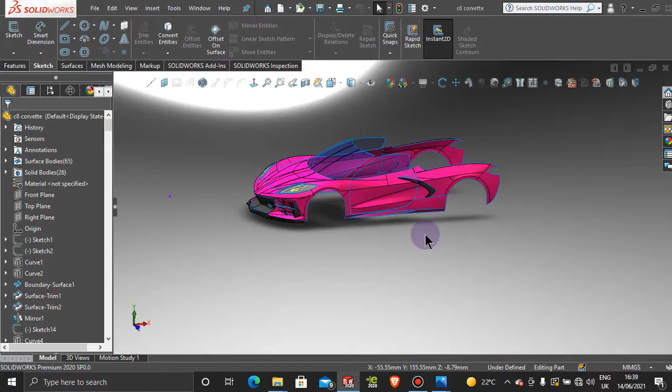Let's open our model and go over a few things. In the last tutorial we finished this section here. In this tutorial we're going to work on the C pillar, B pillar, and the roof of the vehicle, and close up this section here.

If we look at this picture, we have some steps in the roof. So first we're going to create a simple surface, and once we have the surface, we're going to cut these steps into it. It's always easier that way than creating complex curvatures, which of course creates problems.

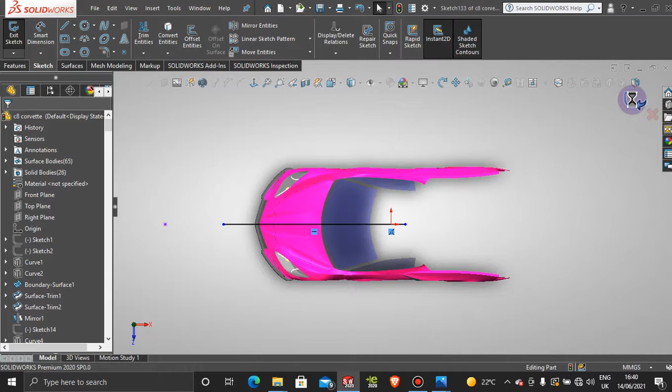Let's start by taking off some of these lines. I want to jump into the top view and make a sketch on the top plane—just a straight line like that—and project that line onto the windshield. So, projection, then sketch on face. I'm going to select this sketch, and for the face I'm going to select this section here. That's okay.

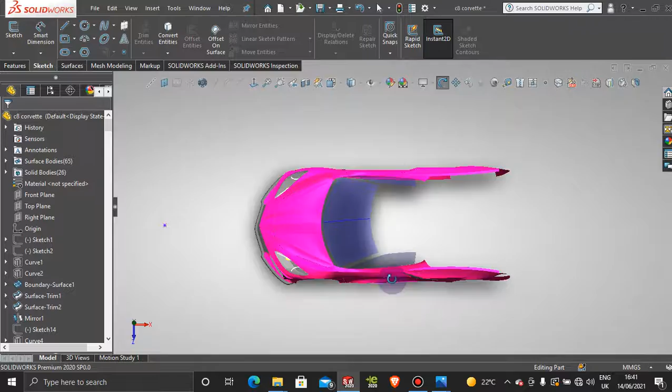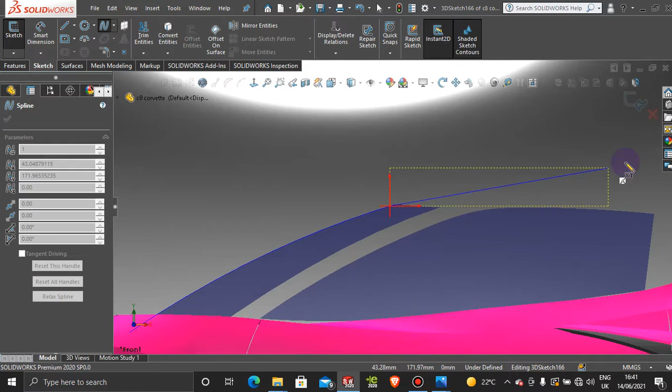Now you have the middle of the car. Let's jump to the side view, and I want to grab a 3D sketch with the 3D spline. I want to snap onto that line here, then just pull this out for now. I want to make that line go all the way, pulling the connector to the end of that point, and make that line tangent with that curve.

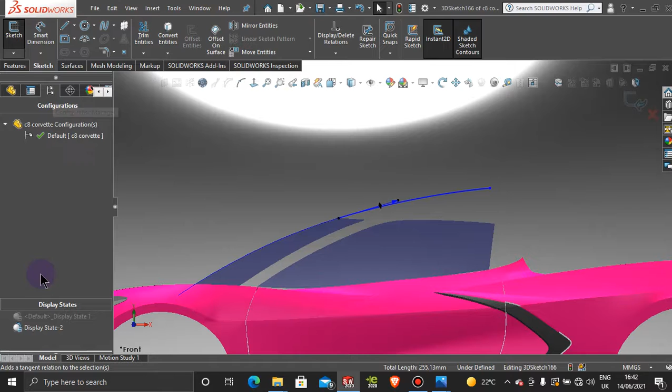Make that tangent. Once that line is tangent, I'll jump over to the first display state and align that line with the top of the vehicle. I'll pull it somewhere about here, and leave that somewhere here, just pulling on this handlebar until we have our curvature.

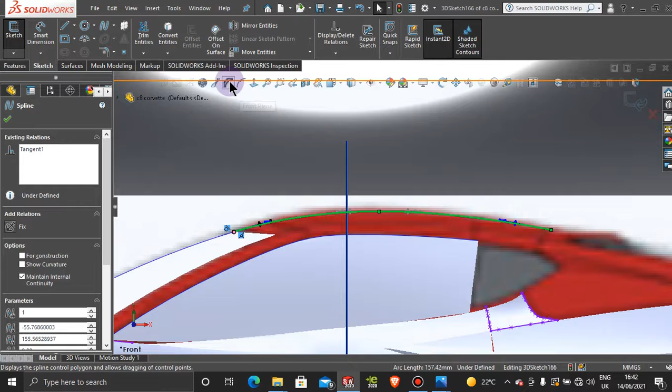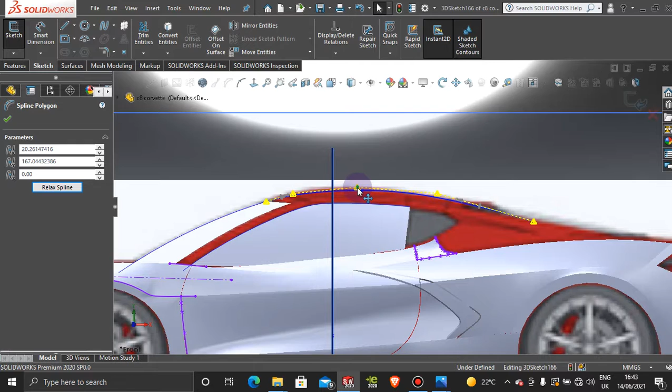Maybe I'll add a spline point somewhere in the midline here. Let's click on that line and add the control polygons, then make some adjustments to the curvature further. I'm happy with that curvature—I'll pull that down a little more somewhere here, and give that a bit of flatness up top. I'll leave that line as it is. That looks good.

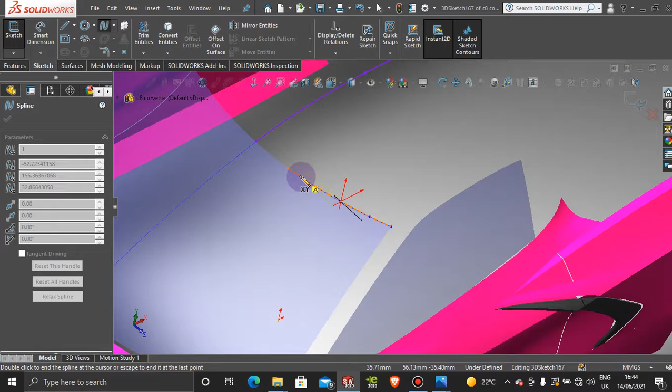So to continue, what I want to do next is probably go to surfaces and do a sweep surface, selecting these edges here. Hold on a second—let's go to sketch, 3D sketch, and grab the spline. I'm going to grab from this corner and follow this window up to this point, then do a sweep surface.

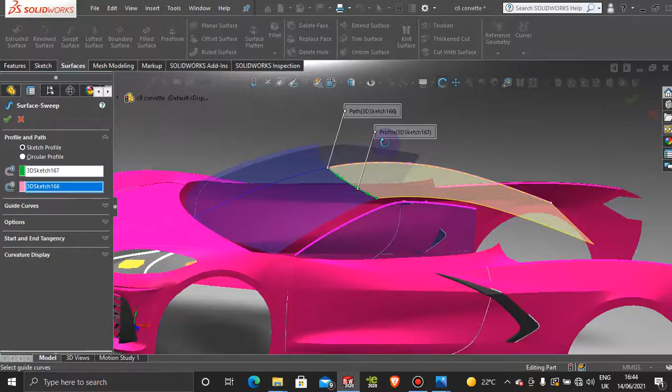So surface, sweep surface. Let's select this 3D sketch and then select this line here. All right, that probably won't do what we're looking for here, so exit that. Okay, instead let's try something else.

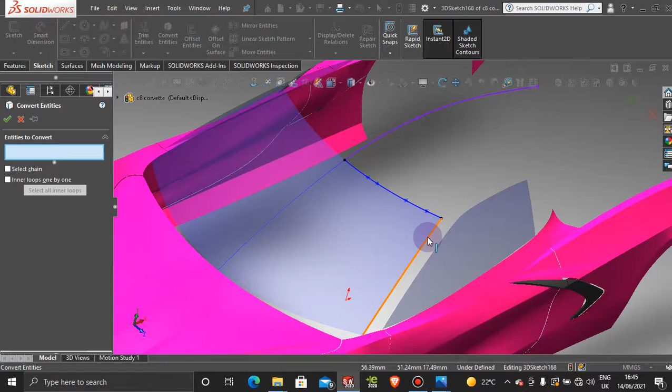Let's do sketch, 3D sketch, convert entities, and convert this entity here. Actually, we might not even have to convert that, so delete that converted entity there.

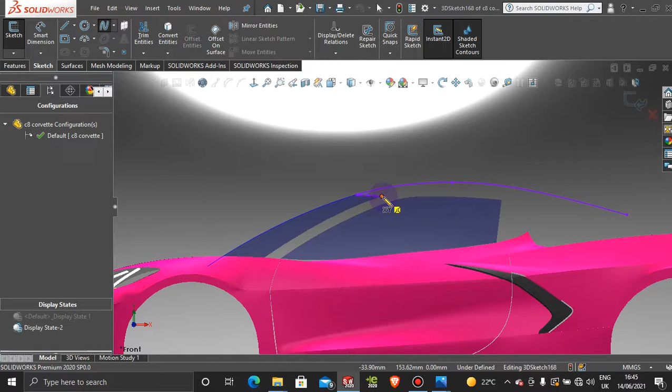Instead, let's jump to the side view and grab a 3D sketch. We want to come from the edge of that window—that's going to be that point there—and come down all the way here, trying to add tangency to that curvature as well. Tangency.

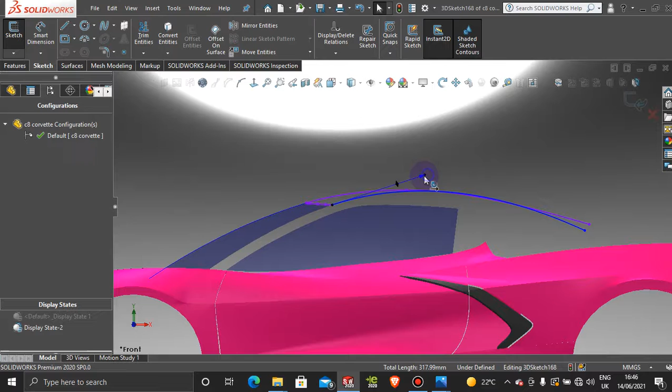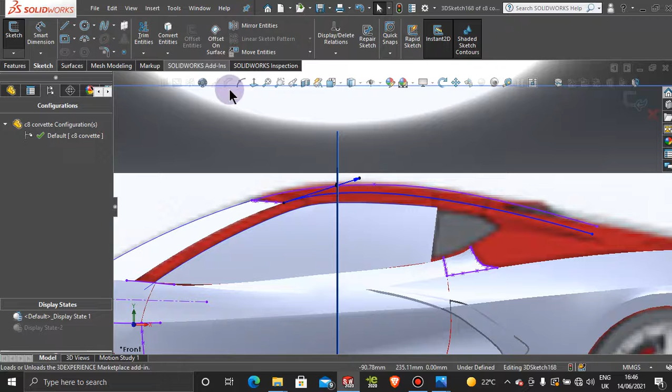Just pull that line until we're happy with our curvature. Let's jump into our first display state. That curves up to that point there, and maybe we can add a spline point somewhere around here. Then click back on that line, add the control polygons, grab onto those polygons, and pull it to this section here.

So I'm quite happy with this window curvature here. We're not going to use the whole line anyways, just a small section of it. Let's jump to the top view and try to align that window in this area, somewhere here, and pull that somewhere in this area.

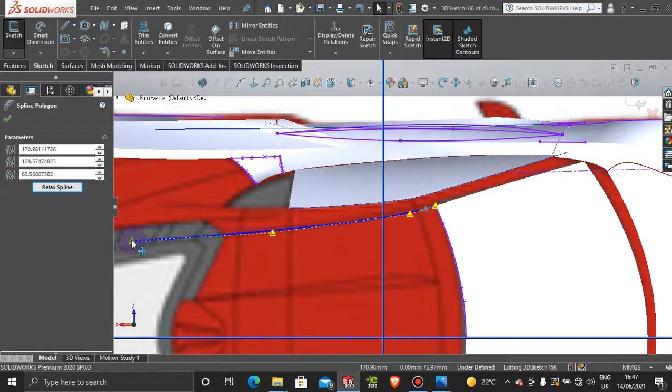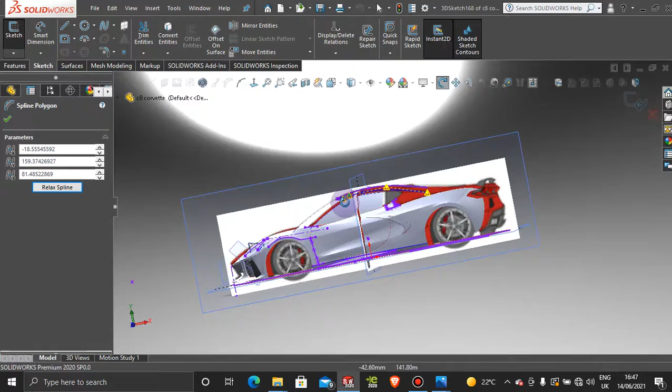Somewhere here. Yes, I'm quite happy with this curvature here. Let's double check from the side. Looks good. Okay, exit this sketch.

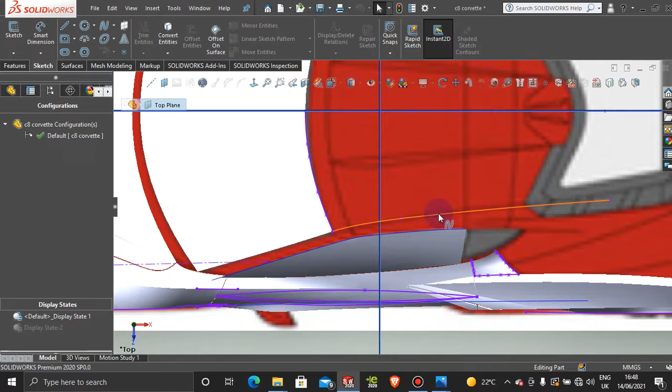All right, let's have a look from the top again here. And then we're looking quite good here on this area. That will go down in this section. Okay, so let's add a 3D curve here.

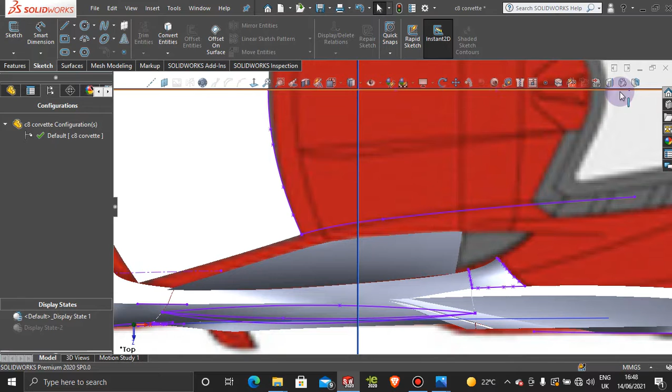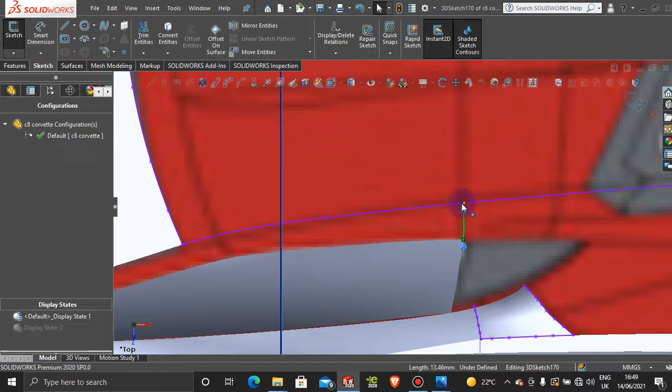I mean a 3D spline. Hold on a second, let's get rid of this 3D curve here, so hide that. Okay, let's jump into 3D spline, and then we're just gonna go from this corner up to this point, kind of straight-ish. So we don't need to fix that. Something like that.

Okay, and then we're just gonna give that curvature some profile, right?

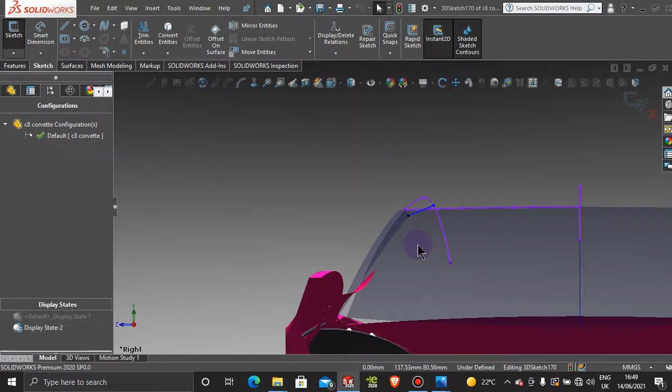All right, so let's click on this curve here, and I'm just gonna pull it out and this way, right? And then I want to fix this point along the z-axis, so we are straight onto the top of the vehicle, and possibly I want to pull this out a little bit so we have a little bit of profile on that.

Okay, so that looks good. And then we can always adjust that afterwards as well. So now exit this sketch here.

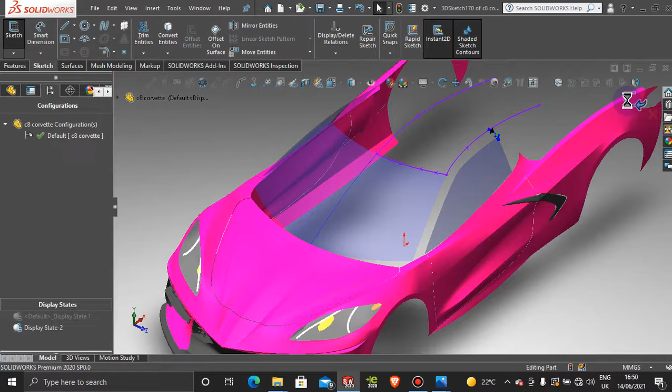And then we come down here and then we create this area. So let's grab another 3D spline. And we're gonna come from this corner up to this edge. And I'm just gonna pull that down until it stops. All right.

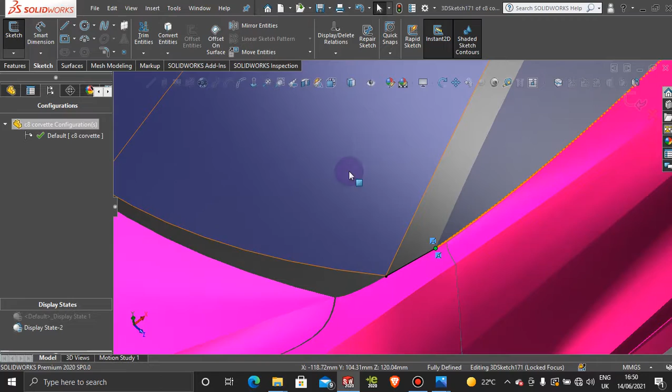And we're going to give that a profile as well. So we can do tangency with this face, and let's see how that looks. No, it's not going to do that. So we're going to edit ourselves.

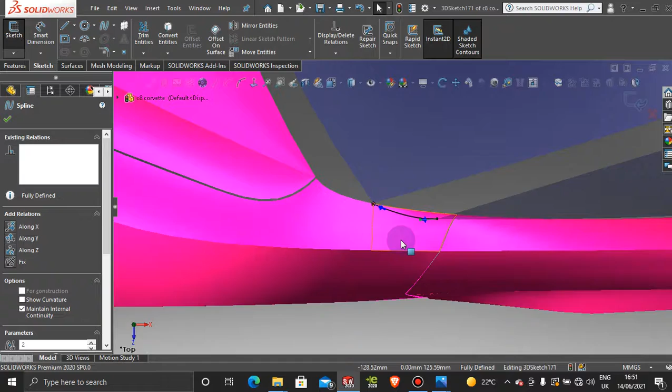Let's grab the point and just pull it out. Something like that, and give this a little bit as well. Something like that. All right, so now let's have a look. Let's have a look at this profile here.

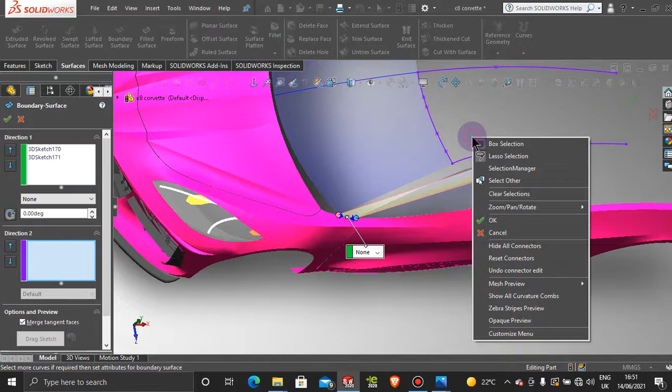Let's jump over to surfaces and let's do a boundary surface. So let's choose these two lines here. And obviously we need to flip these connectors. So flip the connectors. And for direction 1, selection manager, select these two here.

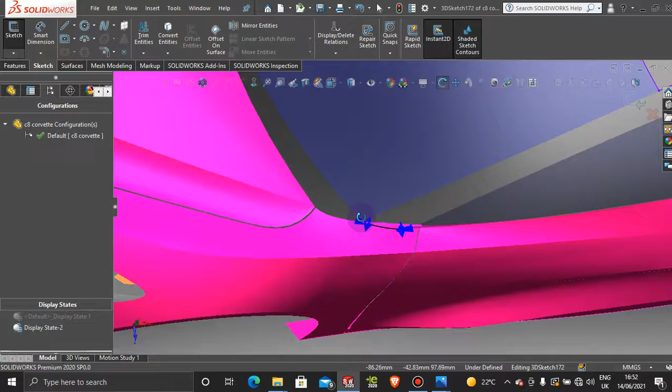Okay, so let's add a 3D sketch onto that, the 3D sketch spline. So we want to get on this point here. And I'm just gonna bring it all the way up here.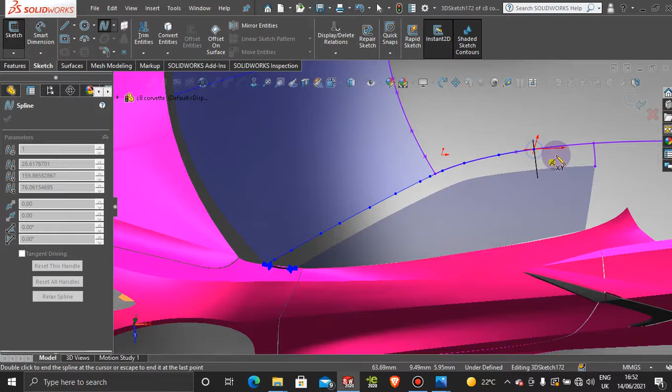Okay, and then now exit, and then now let's add our boundary now. So surface boundary, let's select these two lines here. And then direction 2, let's select our 3D curvature. Selection manager.

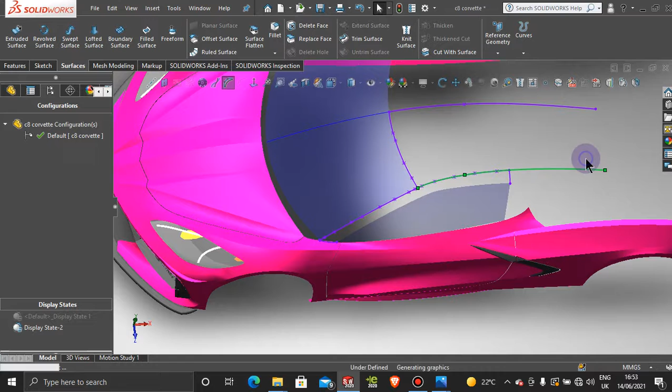Let's do it differently then. Let's select the window first and then select 3D sketch. Selection manager. All right, so let's hide this line for now. And let's see if we are connected here. Unfortunately, we are not connected on that one.

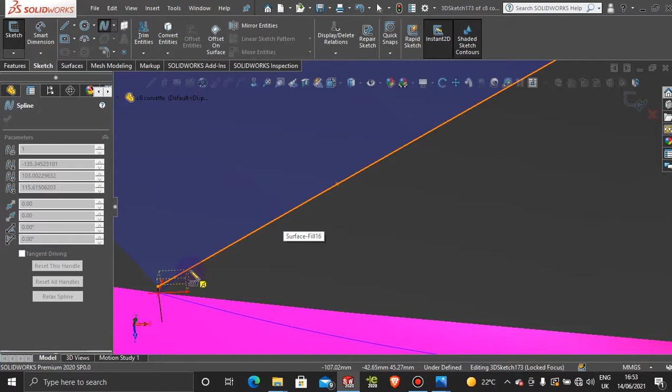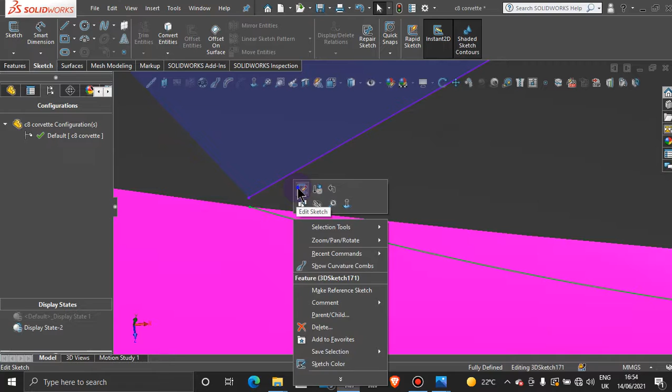So let's come in here and do another 3D sketch, another 3D spline. Or instead, let's take this line here. So exit the sketch. And let's take this line, edit the sketch. And let's connect to that, delete that coincidental. Let's connect to the edge. And you want to be right on the corner. All right, exit here.

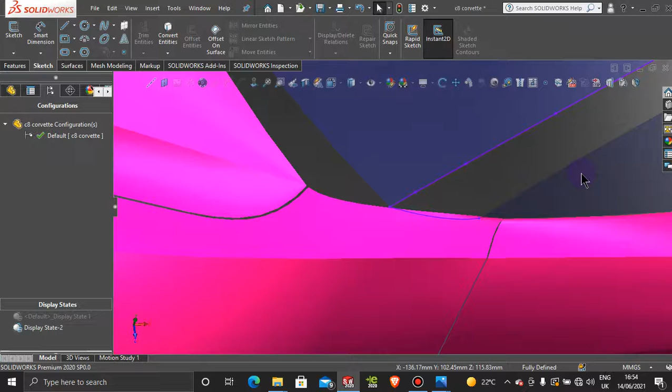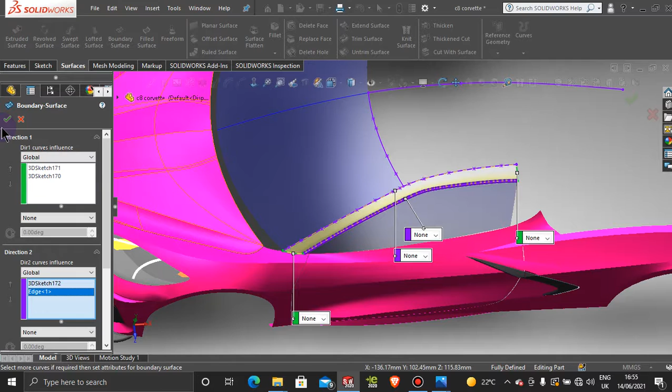And then now it should give us our surface. So let's jump into surface, boundary surface, select the two lines here and direction 2, this line here, that's perfect. And then the side of the window for second direction there. All right, so tangency, we don't have to add tangency anywhere around because we want to see this surface all the way around.

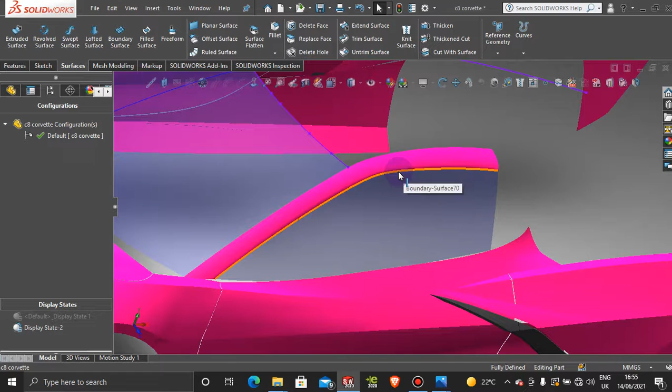Okay, so that looks good. And then we will fix this. It looks actually pretty good over there, boss. So we have a nice curve here. We can make actually this area here, instead of a curvy section here, we can make this sharper in the end or in the future.

We will see. All right, so once we have this one here, let's jump over to the feature tree. And I want to bring back that 3D sketch. So show that we hide before. Okay.

And I want to mirror this body over to the other side. So mirror, mirror over front plane, and then bodies to mirror. It's going to be this surface.

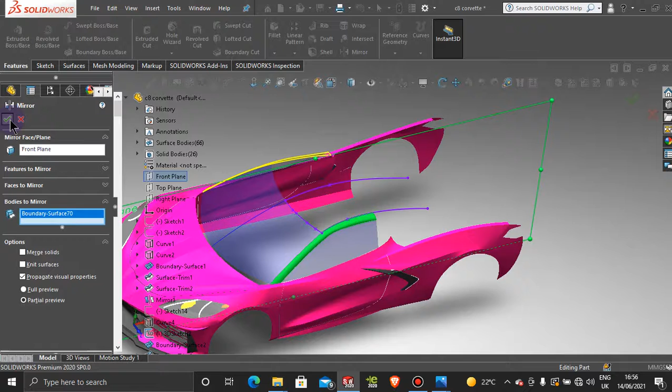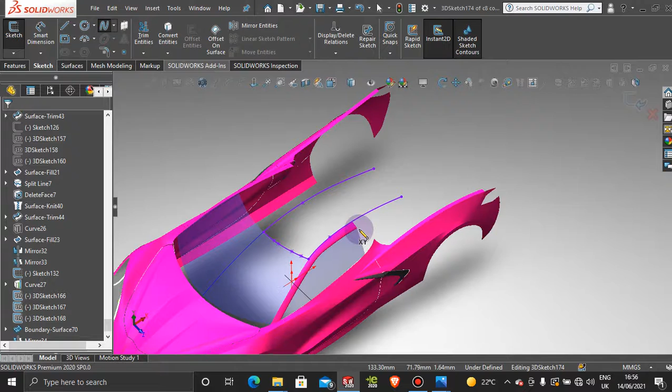Okay, and then now we just want to connect these two lines here. So let's grab obviously a 3D sketch, 3D spline, and then let's connect these lines here, just anywhere on this line. And then we're going to add tangency with this one and this one line here, tangency.

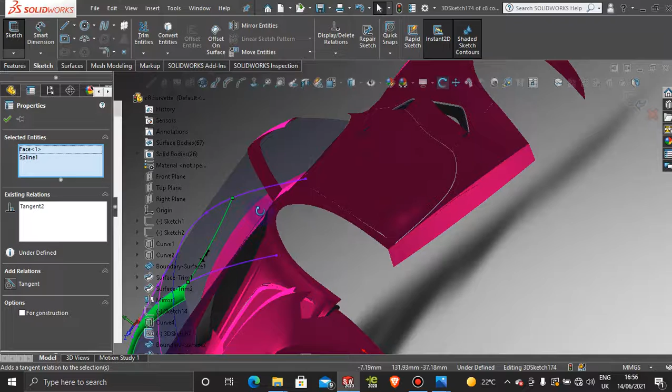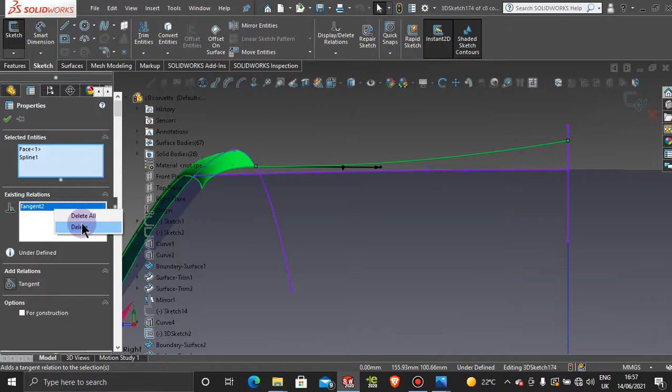Okay, so the tangency is not very good for us in this section, so let's delete that. Control Z to come out of the tangency. Let's exit the sketch first. Oh, that's not doing it, so let's delete that line.

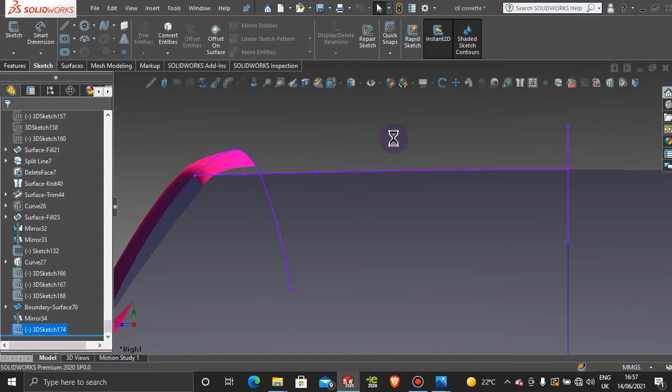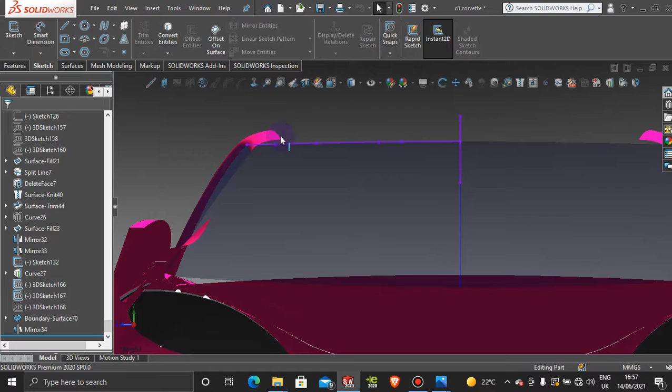Okay, let's hide this line. And let's come to the back here, and try to edit this sketch here.

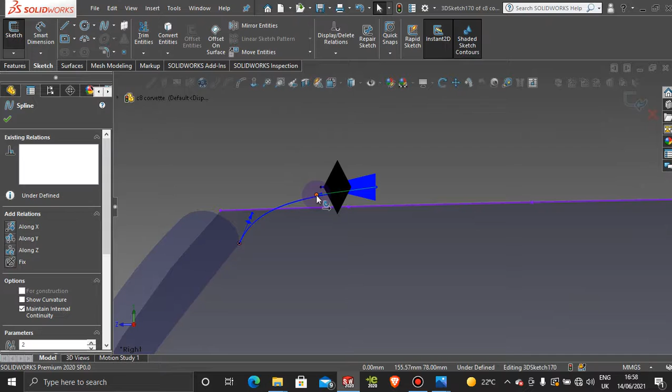So our point control here has a fix along Z, so let's take that down a little bit. Exit the sketch.

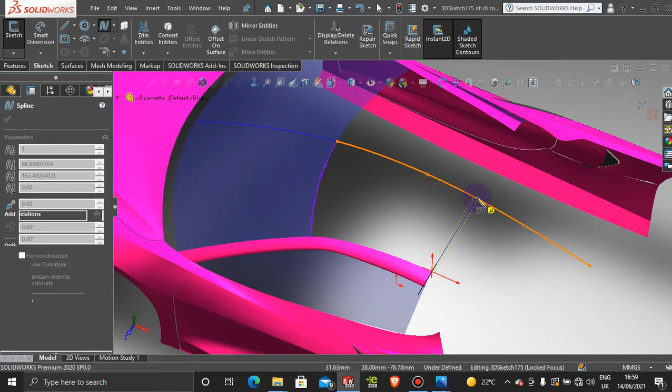All right, and then let's add the 3D sketch again. Let's jump to the top, and then bring back our first display state, so we can see how straight our line should be. So somewhere about here. Exit that.

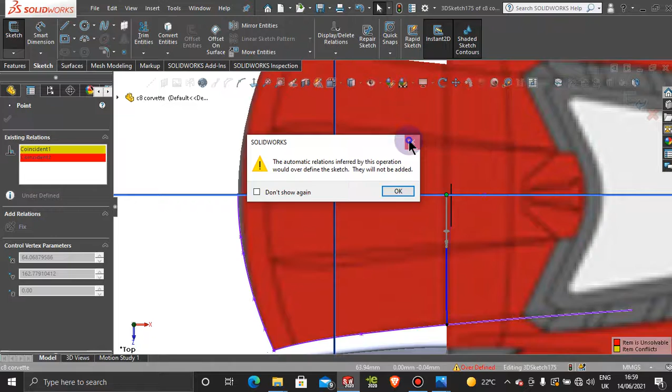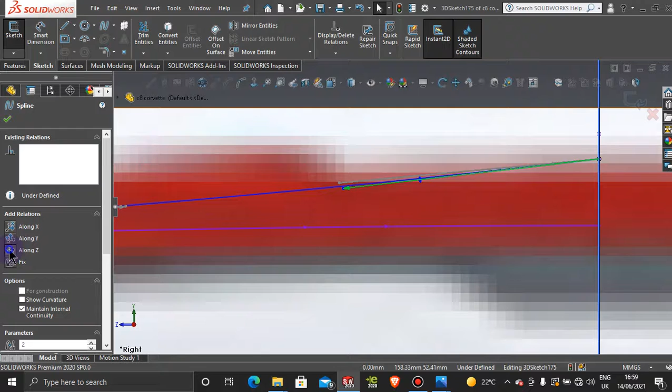We don't need that coincident there. And let's come to the back here. I want to fix this line along the z-axis so that we are not going to have any problems there. Okay, and then we are straight on the top. So exit this sketch.

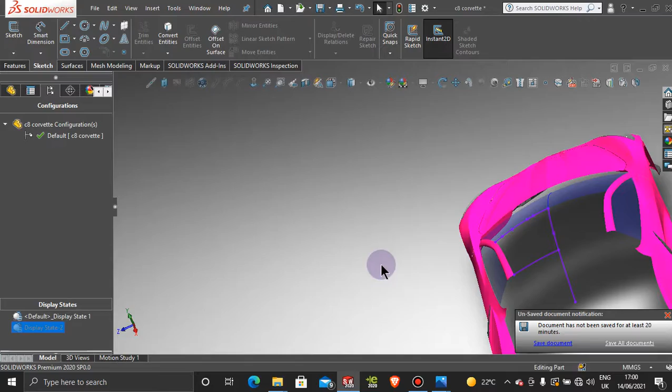And then let's jump over to our second display state here, and let's try and do a filled surface. So let's select this line and this one here.

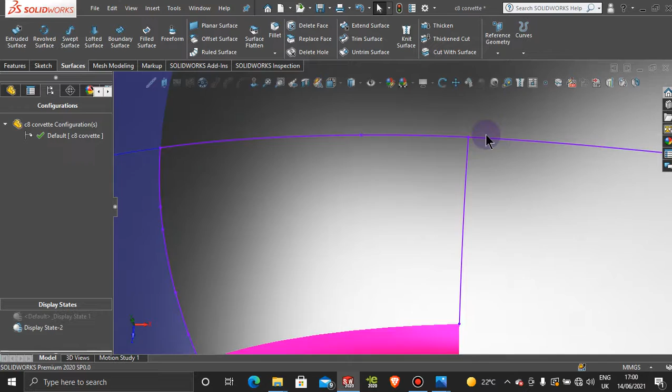All right, so let's jump into 3D sketch here, grab the spline, and let's come up on this edge here. Okay, and jump into surfaces here, exit the sketch, and just try to get another filled surface and see if this time we'll do it.

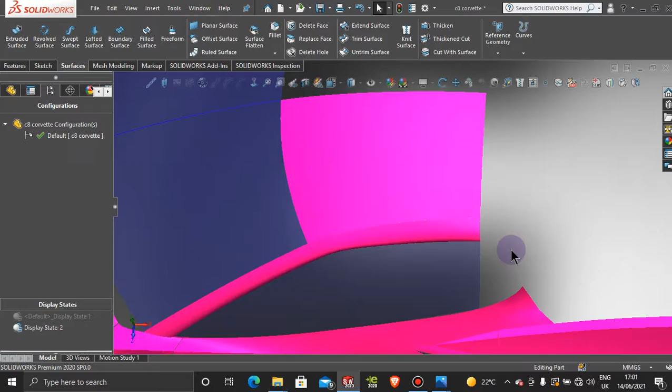They did patch it up this time, so we don't need to add any tangency anywhere. So there you have it, we have the surface here, we have this nice edge there, which we need. Also, we will make that step here as well. We already have a little step there, but we want to make that step a bit bigger, drop that step a bit lower, and there are some other cutouts that we need to do there as well.

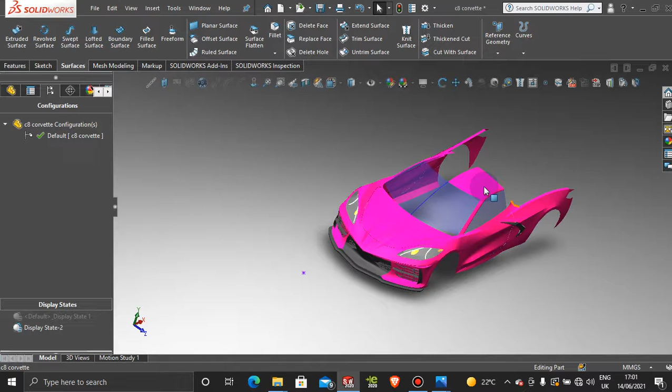So let's jump into mirror here and mirror this surface over, throughout the front plane, bodies to mirror. All right, and let's see our fluidity on the top of that vehicle.

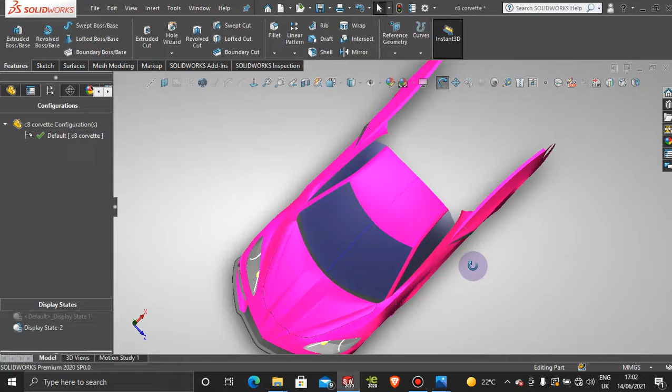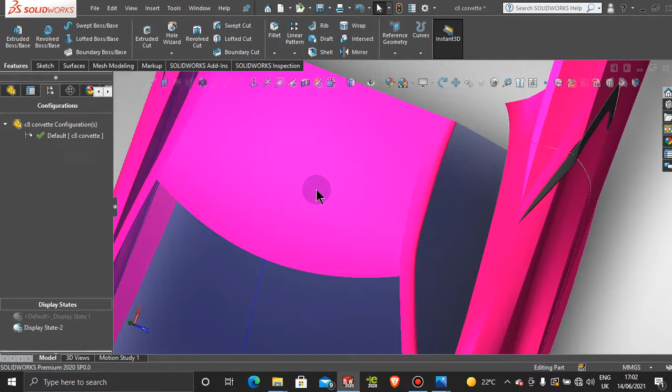So that looks quite good. I don't see any, maybe there's probably a tiny bit, but I don't see any. I think that's pretty good there, right there. Okay, so we have the roof, half of the roof, and some C pillars and B pillars.

Let's save the model here.

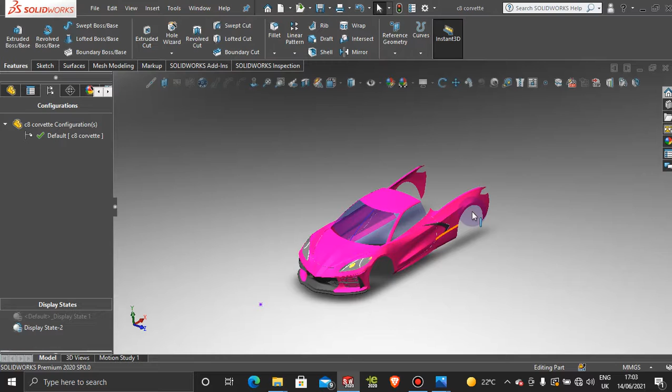So, okay, basically, the model is already getting complex, so it's a bit harder on the CPU. So once we have all the surfaces done on this vehicle and the backlights, when we start doing the mechanical parts of it, the wheels and the engine, that's going to be a different file, and then we will assemble the whole car in the assembly section.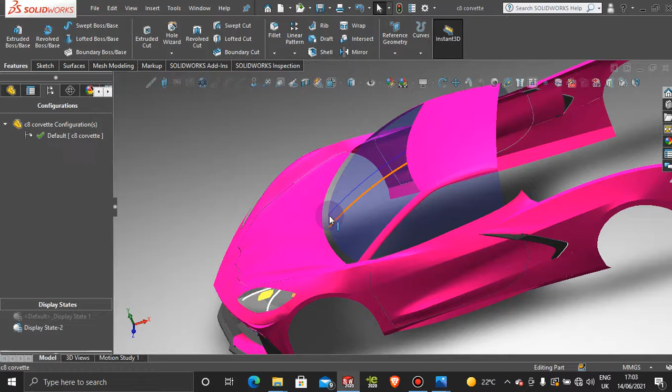So let's do one more thing on this car here. There's some connections that we have to make in these sections here. So let's close up this area here. We already have this beautiful line here that we can use, and we have the midsection of the vehicle here.

Okay, so let's make a 3D sketch, and let's grab a line. I want to go from this point to that line there. And I'm just going to pull that line down to the end. Okay.

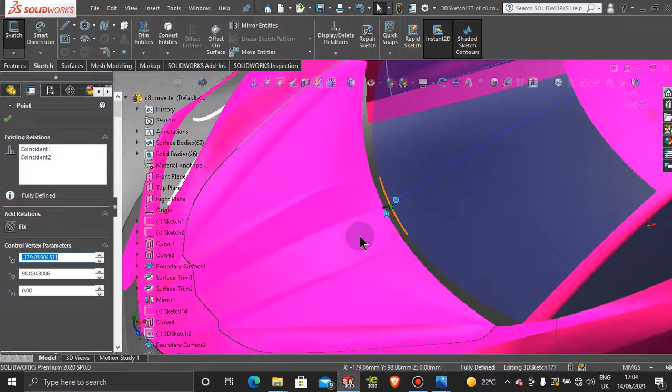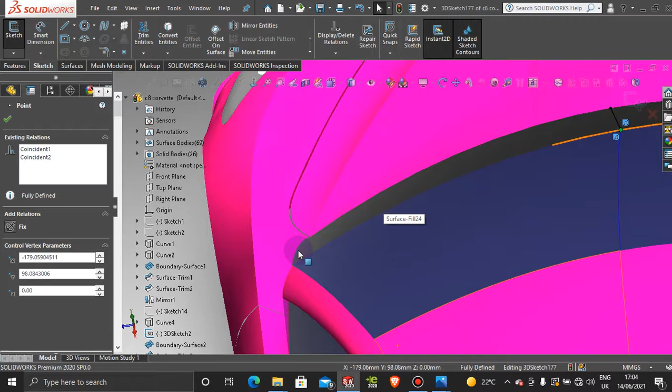So let's have a look from the inside here. Looks like I'm gonna have to clear some stuff out from my PC to speed things up here a little bit.

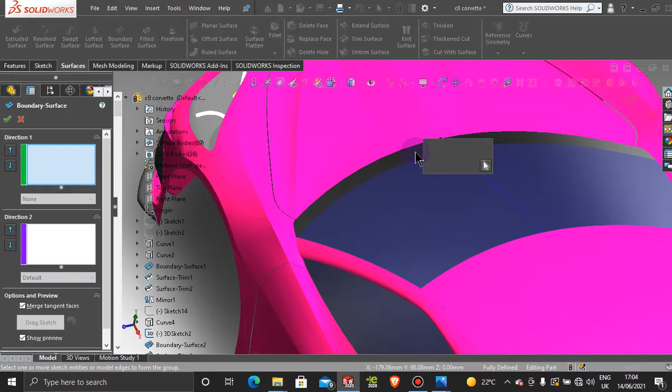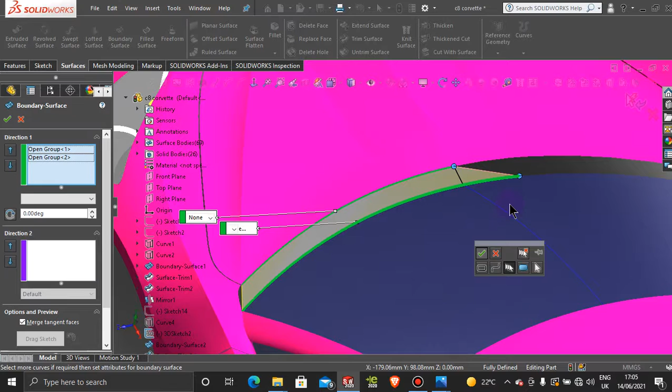Okay, so let's do a boundary surface. Let's do a selection manager, and let's select this line, this little bit here. That's okay. And then press this line here with the selection manager, and press OK. Obviously, going to pull this line until we see the black dot. And then press OK.

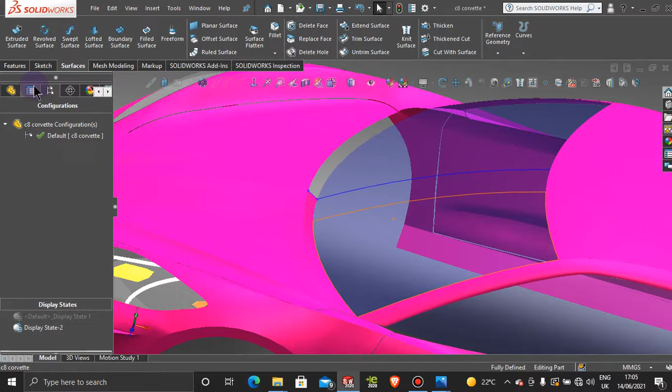All right, and then let's mirror this section over to the other end. Mirror, and it's going to be over the front plane, bodies to mirror, and this section here.

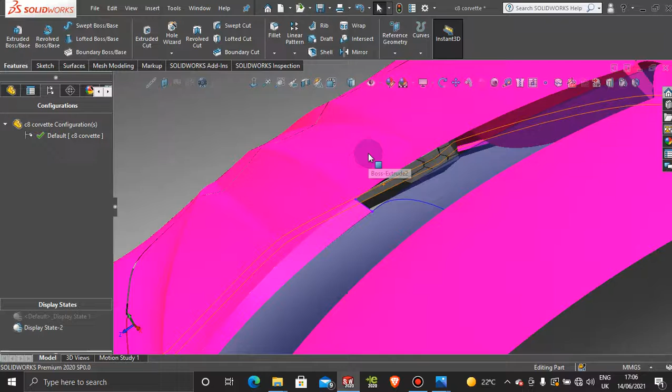Or let's not do mirror, let's do the same thing as we did on the other side as well. So let's go to surfaces, boundary surface, and then selection manager, and let's choose this small section here. It's okay.

And then selection manager. Press OK, and we need to flip these connectors here. And we're just going to pull this point to this section. Of course, for direction 2, we can use this edge. And then press OK.

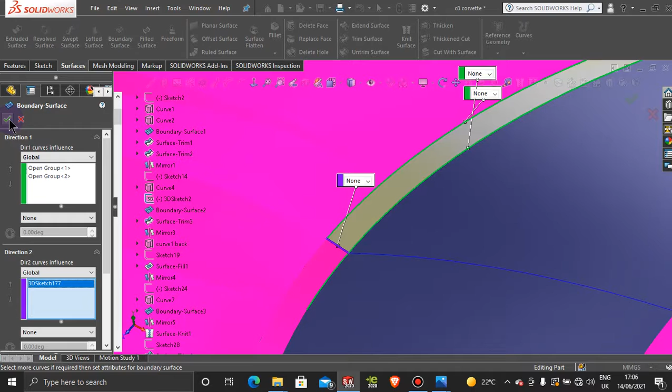And that surface is created right there. Okay, so we still need to fill up the surface here, which we will.

Let's add an appearance to the section there, plastic. Let's choose low gloss, and then let's choose some dark gray.

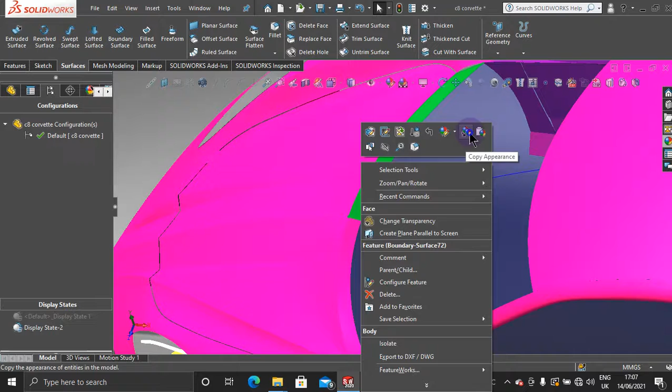And let's copy this appearance and add it to this surface here. Okay, so we still need to create our windshield wipers in that section there, which we will.